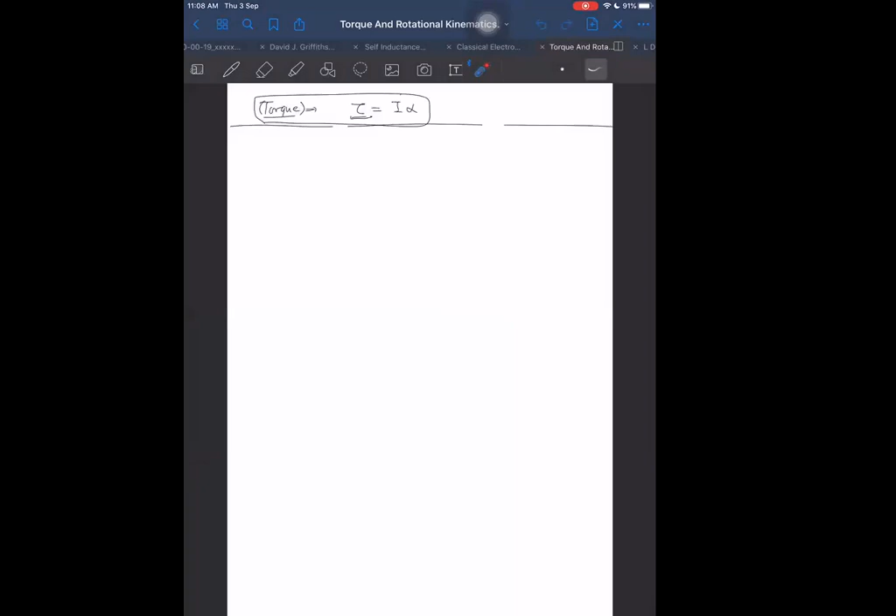So let us start. Can you see the screen? Yes sir, we can see. All right, let us continue then.

So tau equal to I alpha, I told you yesterday, right? I told you the example where the body was just rotating in one plane. The plane of rotation is fixed, so we are writing this tau is equal to I alpha.

Okay, next we have some cases. One more important thing for moment of inertia only, I have to tell you, I think that will be very much helpful for you in many places. Let us say I want to find out the moment of inertia of a triangle.

Let us say the total mass of this triangle is capital M. What I will do is take masses at the center, m by 3 each, at the center of one length, center of the other length, and center of the third length. The moment of inertia of this triangular plate about any axis will be the same as the moment of inertia of these m by 3, m by 3, m by 3 masses about any axis. You can keep on finding out now, and keep on experimenting with this.

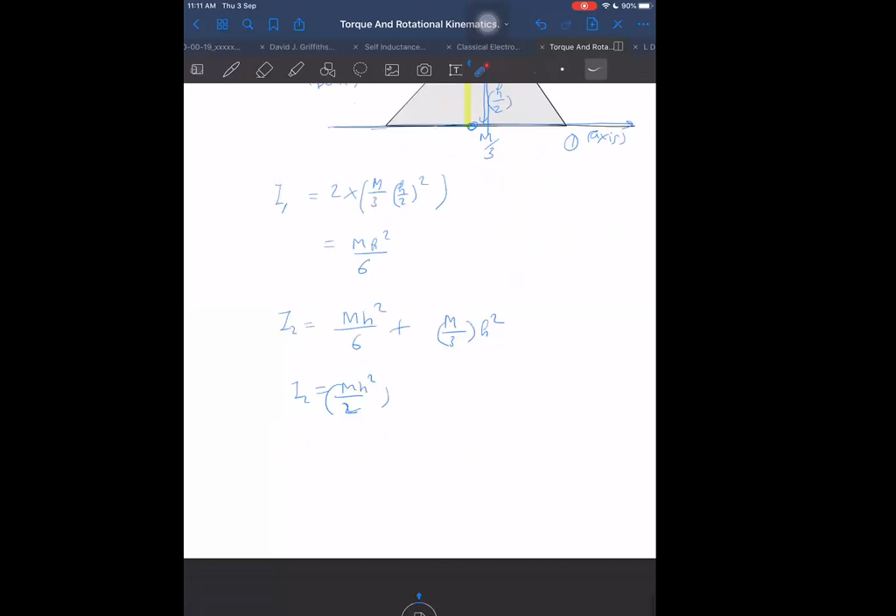We can do that, right? And it will always work about any axis. In the inverse, we can always find it out very easily. So it is very convenient, very helpful. And don't forget that formula, that also might be helpful if they are asking for oblique axis.

I told you to find out about the oblique axis, first of all we should know two symmetric axis. If I know about this axis and about this axis in the same plane, and they are asking about this axis, let us say this is the perpendicular axis, it is x-axis. They are asking about this, and it is angle alpha, and it is 90 minus alpha. Then I have told you this formula also, how to find out about this oblique axis: Ix cos square alpha plus Iy sin square alpha. So these will be helpful for you.

And okay, in fact I think once you know the triangle formula by this simple method, you can use it to derive other formulas also. For example, let's say I want to derive for the circle. For the circle also, I think I can do something, derived in the same way as for the triangle.

I will take maybe some small element here, and for this triangle, I will break it into small triangles. And for each small triangle of dm mass, I will write dm by 3 here, dm by 3 here, and dm by 3 here. So here it will be 2 dm by 3, at a distance r by 2 from here, right? R by 2 distance away, what will it be? 2 into dm by 3.

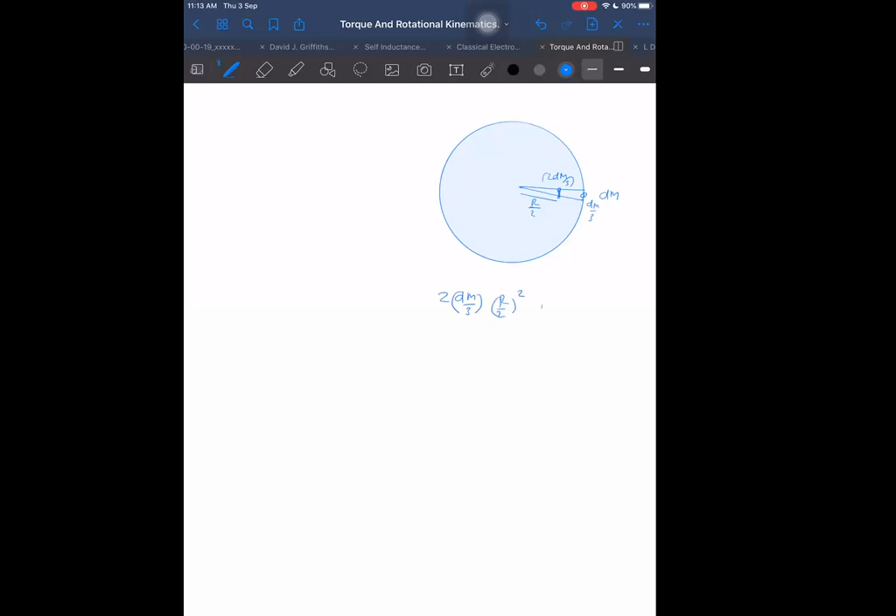Then I will find out its moment of inertia. What will be its moment of inertia? It will become 2 into dm by 3 into r by 2 square, plus dm by 3 into the total distance up to this, R square. That is r square. So what is that coming out to be? That is coming out to be dm into r square by 6 plus r square by 3, that is by 2. Now this is for dm.

Now once we know for the sector, then total will also become r square by 2 common, mr square by 2, sir. Because we are finding about this axis, about the perpendicular axis. Sir, about the perpendicular axis I am finding out. Okay.

See how easily we can get the things here. We divide into triangles and we can do this for this also.

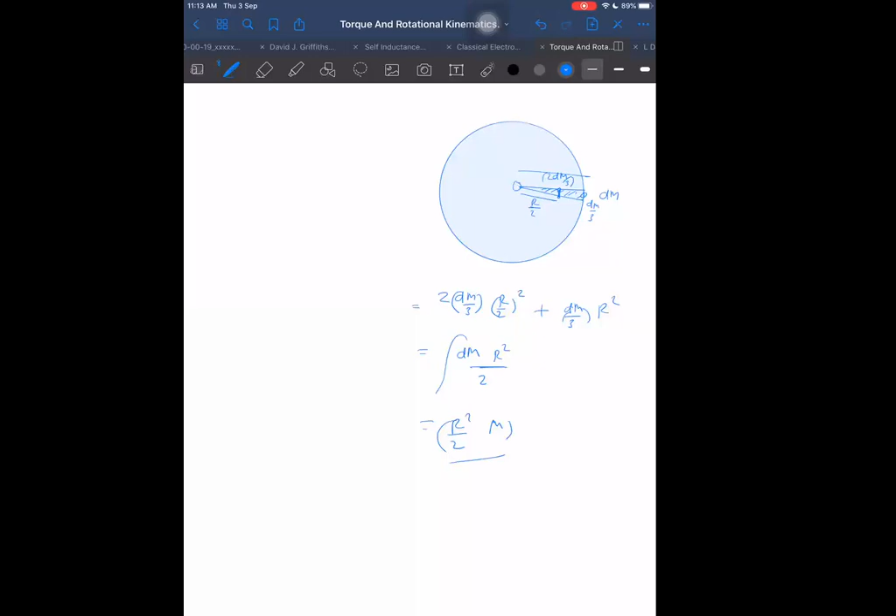This triangle trick is only applicable for triangular plates of uniform mass density. So there it will be helpful. But if they give us variable mass density, then such tricks will not work. We have to find out by normal ways only.

Anyway, let us come to application of tau equal to I alpha. Application of tau equal to I alpha.

So what application can I take for this? One, I can take a very simple pulley problem to start with, and then after that I will move on to other problems.

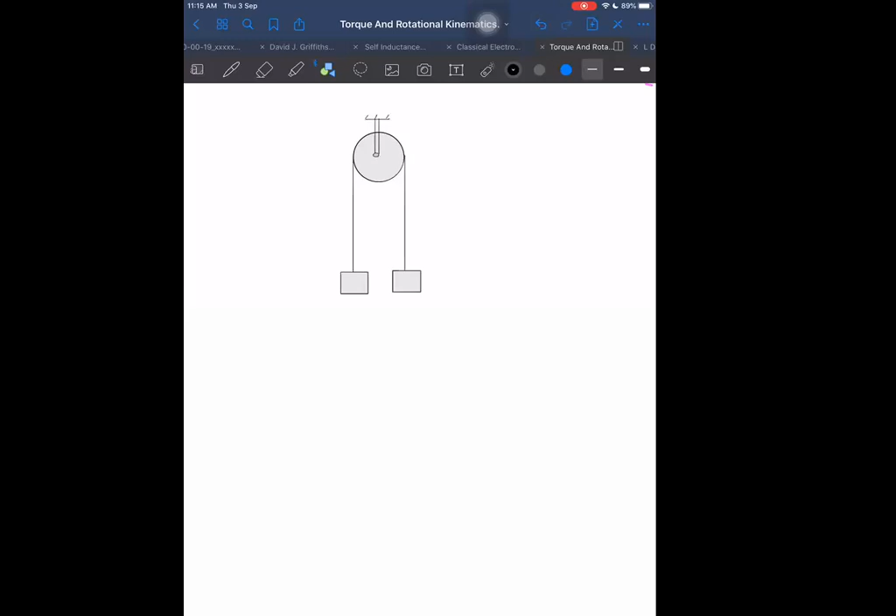Pulley has two hanging strings. One string here and another here. These two strings are attached to two masses under it, one mass here, one mass here, and this is attached to the ceiling this way. Now it is free to rotate about its axis, and sufficient friction is there.

First of all, the information given is that there is sufficient friction between the pulley surface and string.

One thing given. Second, it is free to rotate about the axis passing through it, and the pulley is free to rotate about its axis.

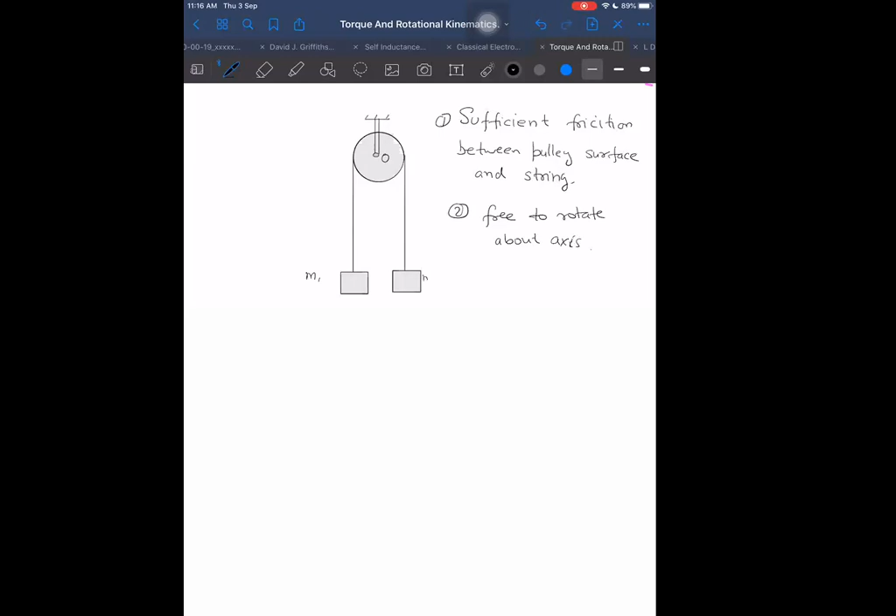Second information given: remaining mass m1, m2 given, and its moment of inertia about point O is given. So m1 is given, m2 is given, and I about O point is given. Third, what we want to find out is acceleration, and radius of the pulley is also given as r.

I told you yesterday, what I can do here is take it as r, and say it is going up with... let us say m2 is the bigger mass. If m2 is bigger, then it will have angular acceleration in which direction? Start with angular acceleration first. Always start with angular acceleration, it will be more convenient.

So it will be r into alpha upwards for this also, because this is a single string. So here acceleration and here acceleration will be the same. Here acceleration down and here acceleration down will be the same. So therefore here also it will be r alpha. Is it okay? Yes, sir.

Then now other equation we can write, for m2g downward, tensions we can write: m1g, m2g, that is it. And in between here tension T this side, tension T this side, but here tension T down and here tension T down. Tensions will be equal on it, sir? Tension will be different, no sir? Different, T1. Otherwise, obviously it won't rotate.

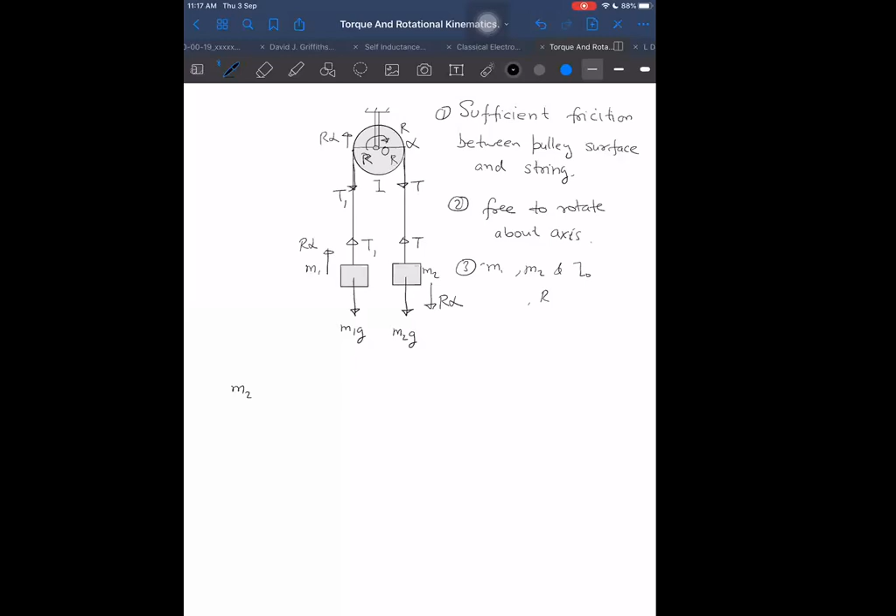Yes, that is one big thing: when this friction is present, I told you in laws of motion also, that when friction will come, then definitely we should not take the tension same. We should take different tensions, otherwise it will not rotate.

So we can write m2g minus T2, supporting force. Always go by this method: r alpha is downside, so supporting force first, then opposing force, minus opposing force is equal to mass into acceleration.

This is the equation. Next equation: T1 supporting force minus m1g is equal to m1 into r alpha, equation number 2. These are translatory motion equations, equations of sigma f equal to sigma mi ai type.

Although here there is no sigma, it is a single force and not the sum of two forces. So it is like the resultant force here, that sigma is not needed here. Just mi into ai, or m into a, is enough. This kind of equation we are writing here.

Now, one thing here: because I have to take the torque equation for the pulley, I recommend converting these equations also into that form. How to convert into that form? Multiply by r in all directions, in all places. If I multiply equation 1 by r, and multiply the right hand side also by r, then I will be getting r into this thing, and here also r into this thing — it will become r square.

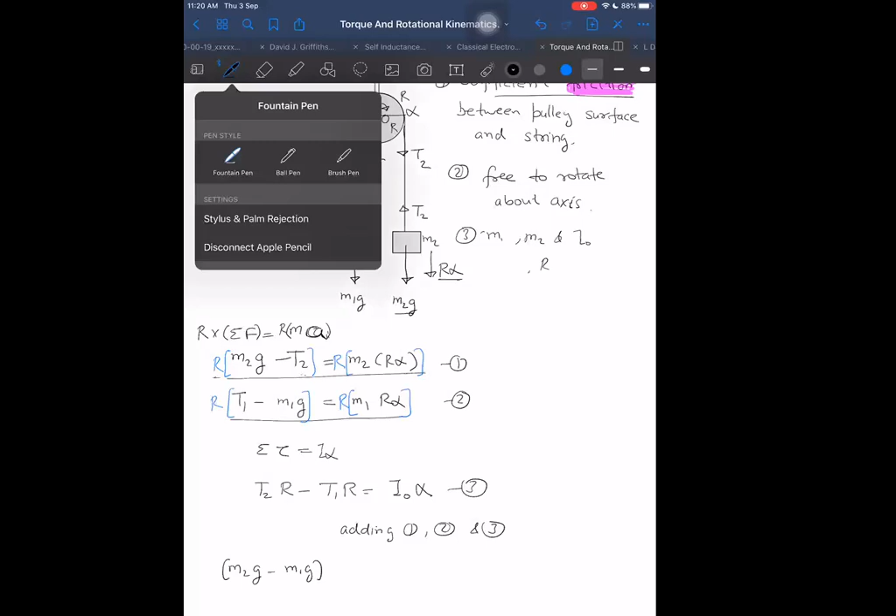Now, why I did that multiplication of R with this, now you can understand, because it will help us: minus T2 into R here plus T1 into R there. When we add 1, 2 and 3, our T2, T1 terms will cancel. Then we will be left with M2G minus M1G into R, whole multiplied by R equals to I into alpha.

This equals M1 plus M2 into R square into alpha, plus M1 into R square plus I naught also, plus I naught into alpha. So it is like that only, that net torque is equal to net moment of inertia into alpha.

Now, obviously, the moment of inertia does not make sense for which masses? For these masses, because these are not rotating about the pulley. But still, this formula works.

Why does it work? If you want to remember why it works, I have a simple way to tell you. Imagine that we know this thing will not depend on the length of the string. If it does not depend on the length of the string, I can take the length of the string so small that I can make the masses point masses, M2 and M1 like point masses. I can make this string smaller length, assume it is of this much length, then even lesser, then so much small that it is just almost touching here only.

Then it will be like M2 touching here, and M1 touching here. Then these two torques will be acting, and moment of inertia now will be like a single body which has moment of inertia not only I naught but also M2 R square and M1 R square. So that's why this is just a way to remember that we can see the net torque is coming out to be I into alpha.

We can think in that way. It means our answer will be same. If I give you this problem: pulley, and here a point mass attached and fixed to it, point mass fixed here and fixed here. These masses are given to us as M1 here and M2 here. This is I naught for the pulley, remaining pulley I naught, meaning the part other than M1 and M2, that is not included in this. M1G is separate here, M2G separate here.

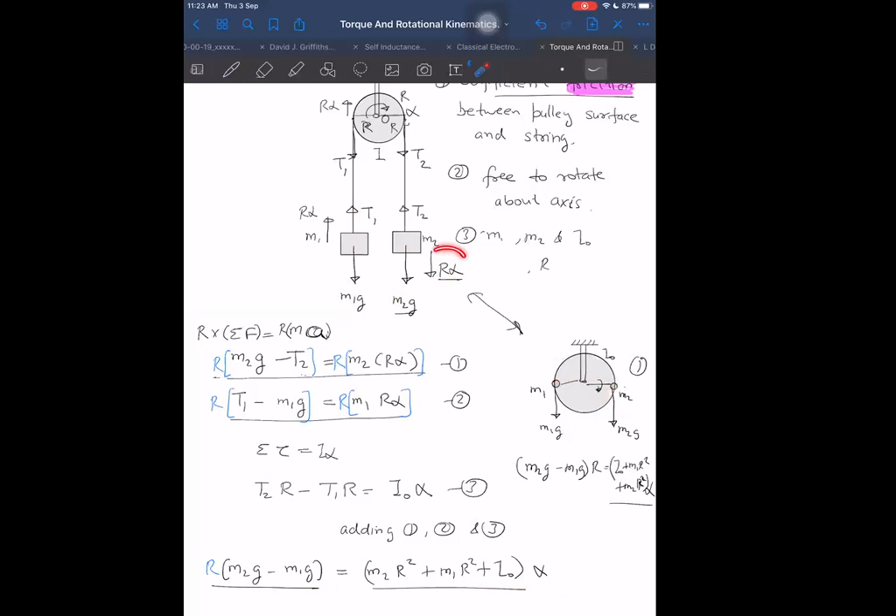But here it will change, because then M2G will come this side, M1G will come this side, torque will become different, and moment of inertia will become different. So these two are equivalent only in the initial stage.

But even if you remember that, then it will be convenient. Why is it convenient? Because in one step we are getting the answer. We don't have to write all these equations also. Just net torque is equal to moment of inertia into angular acceleration.

All right, let me give one more example with a spool. I naught, with the spool, I will give an example now. Spool means, I have given you before I think a 3D diagram of the spool. It is something like this, with one in between, some connecting cylindrical rod will be there, something like that.

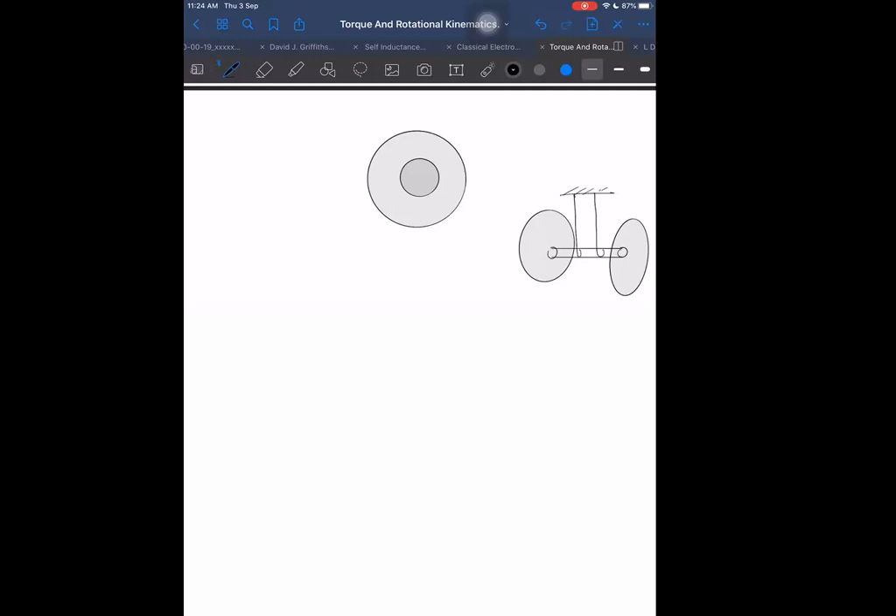Now let us say we are attaching it to the ceiling. So this complete diagram, we can simply draw as one circle here and another circle here. Inner circle of radius R1 and outer circle of radius R2. This inner circle is because of the cylinder. But we will just make its diagram simplified in this way.

This way, this is a string attached here. These are two strings there. Imagine these two strings attached to the cylinder. No, basically not like this here. Basically this is slightly different here. Okay sorry, that case was different.

Okay, first let me take this, I will draw separate again. This is not the diagram for this. This diagram is something if you want to see: imagine it is one pulley, and with that another attached pulley. The two attached pulleys are there, and along the axis somewhere we are connecting this, maybe by this way we are connecting. There are again maybe two such rods which are connected to the axis of this. Imagine like that, and this is rotating about the axis.

You can imagine this way: this is one rod, this is another rod here, some vertical suspensions, and this is connected to one rod. Around it there are two, there is one pulley only, but that one pulley has an inner cylindrical part coming out of it. Imagine like that, and that is rotating about this. Imagine this is the situation here. Can you imagine it now?

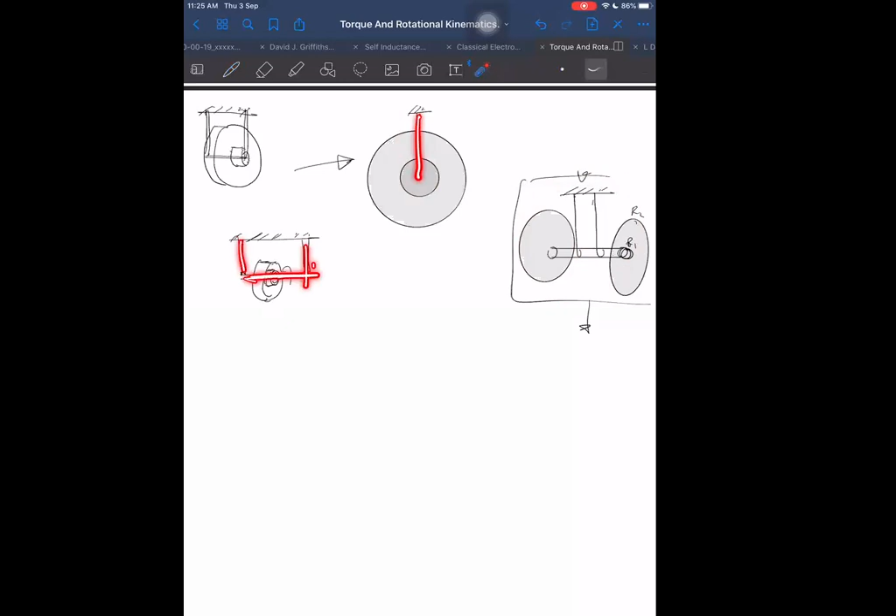Okay, this diagram will be different, I will draw. That was a different thing, but now for this, because it is wound around it, I have to draw something like this. That is a different scenario. But here it is attached to the axis, and this rod is passing through the axis, and around it we have some cylindrical pulleys. It is a single pulley only, but that single pulley has two different radii. It has one coming out, that radius is this, and the inner is also there, that is coming out of it.

Now in this we can attach masses in this way also: one mass I can attach to the inner side and the other I can attach to the outer side. That is also possible, so let us do that. And I will ask you this question, you have to answer it. One is attached here, wait a second.

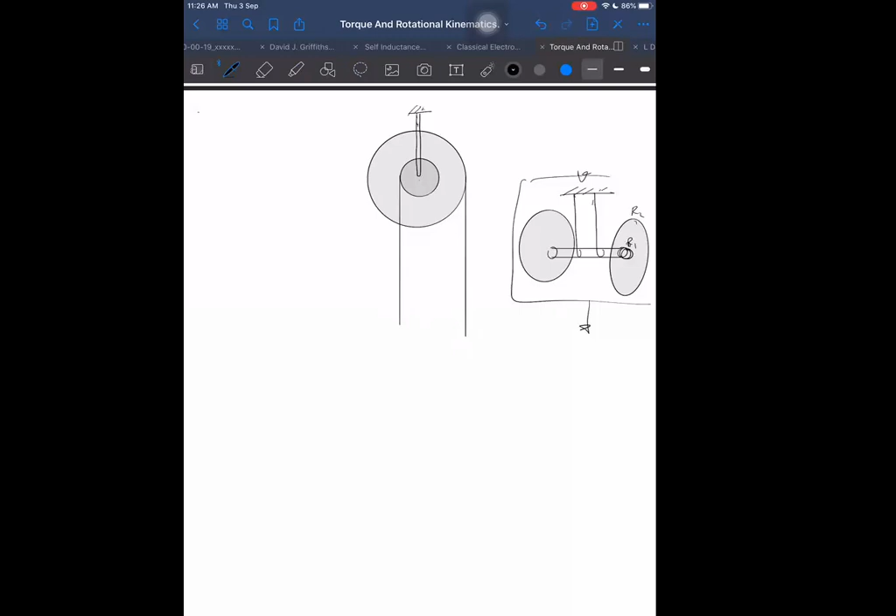This is one, and the other one is outside. This is the other one. Left hand side mass is M1 and right hand side mass is M2. Start solving it. The moment of inertia of this complete spool or pulley is given as I0, about point O. Again, same conditions, frictionless inside, axis completely frictionless, but surface has some friction. Radius is also given: inner radius you take as R1, and outer you take as R2. This mass you take as M1 and M2.

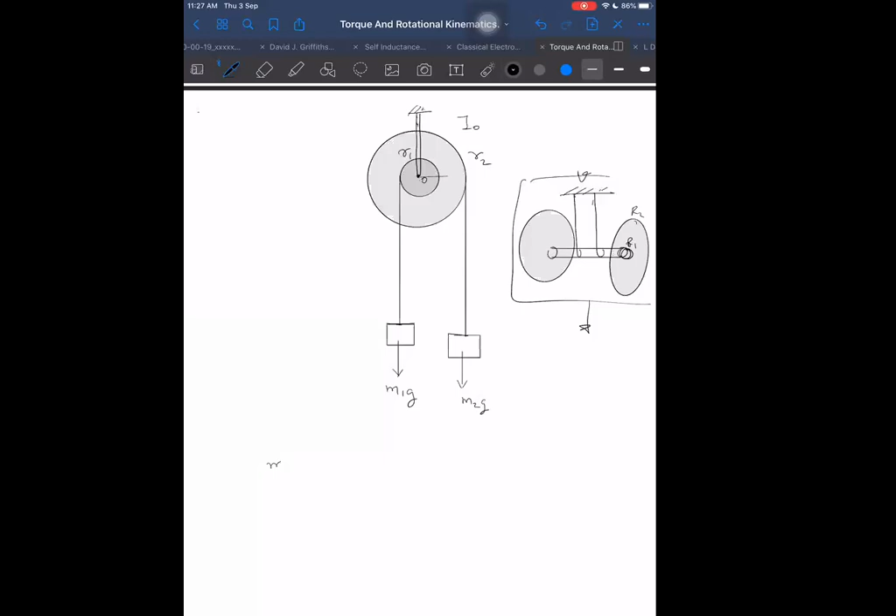How do we do this? Same way, net torque. What is the torque now? Which side has more torque? Assuming M2 side is more, and it is accelerating this side, then M2G into R2 minus M1G into R1 is equal to moment of inertia about the center of the pulley, plus for M2, using the trick that M2 is attached here, we get M2G R2 square plus M1G R1 square, not G, M2 into R2 square, plus M1 into R1 square.

What do you want me to find out? Alpha only. So we are getting alpha equal to M2G into R2 minus M1G into R1, upon I0 plus M2 into R2 square plus M1 into R1 square. This way we can quickly get the answer in one step only. This is our answer, this is angular acceleration alpha.

Now if somebody asks, I don't want alpha, I want accelerations, I recommend you do it this way only. After finding alpha, write R1 alpha as the acceleration, and R2 alpha as the downward acceleration at this point, since it is rotating about it with angular acceleration alpha, like circular motion. For circular motion, tangential acceleration will be R2 alpha here, and R1 alpha there. So it's simple. From R1 and R2, we can find tensions easily. Is it right? Yes, we can do it.

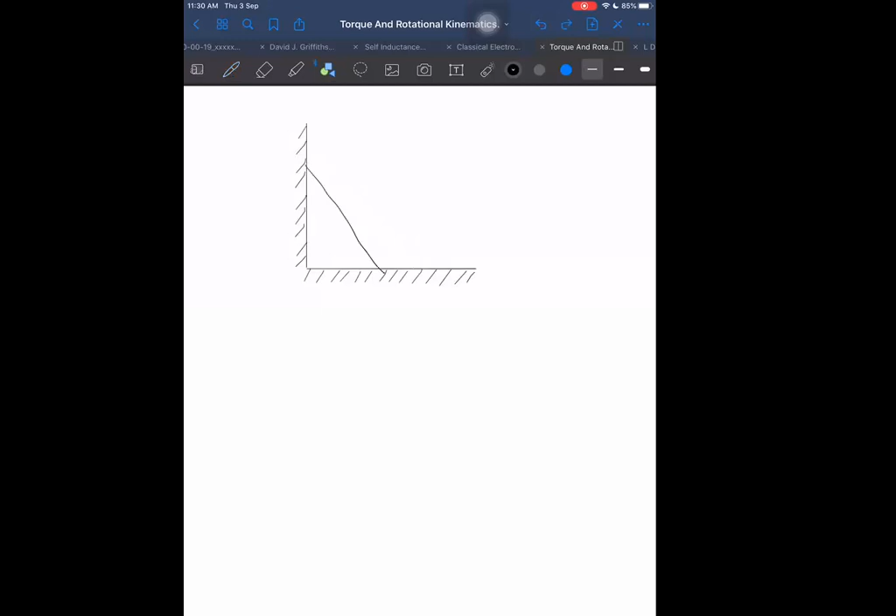These are two walls, and these are the diagrams. Now this is mass m, and as you can see from the diagram, let us say the surfaces are frictionless, mu is zero everywhere. Another question I will take after this, in fact from Pathfinder as well once this is finished—there are so many nice questions there.

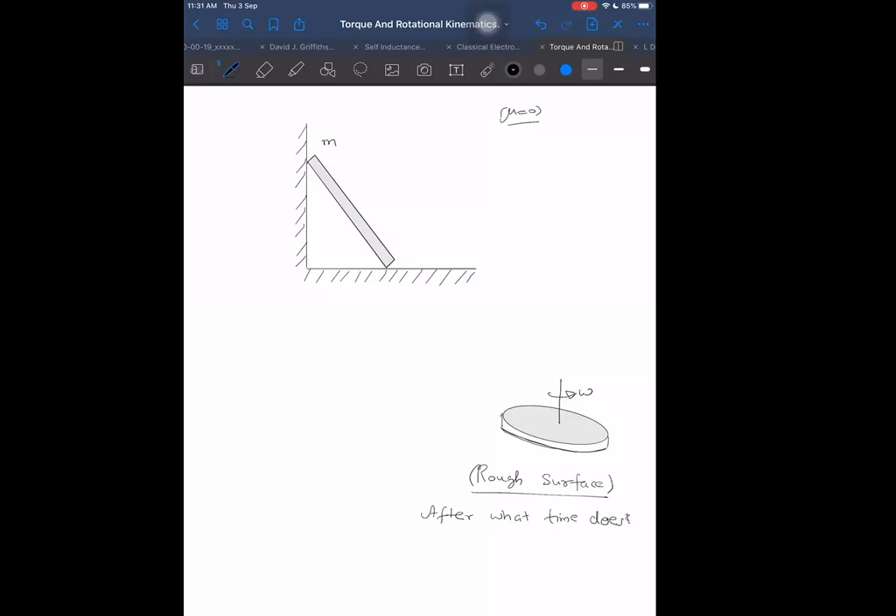This one is a disk, and it is rotating with angular speed omega, and then it is just placed gently on a rough surface. It was rotating with angular velocity omega, placed gently on the rough surface, and we have to find out after what time does it stop.

So we'll do this question first. For the upper one, we have to find out what—angular acceleration maybe. Can you find out the angular acceleration for the upper one? And another question I can ask, a very simple one—although it may not appear that simple in the beginning, but it is easy.

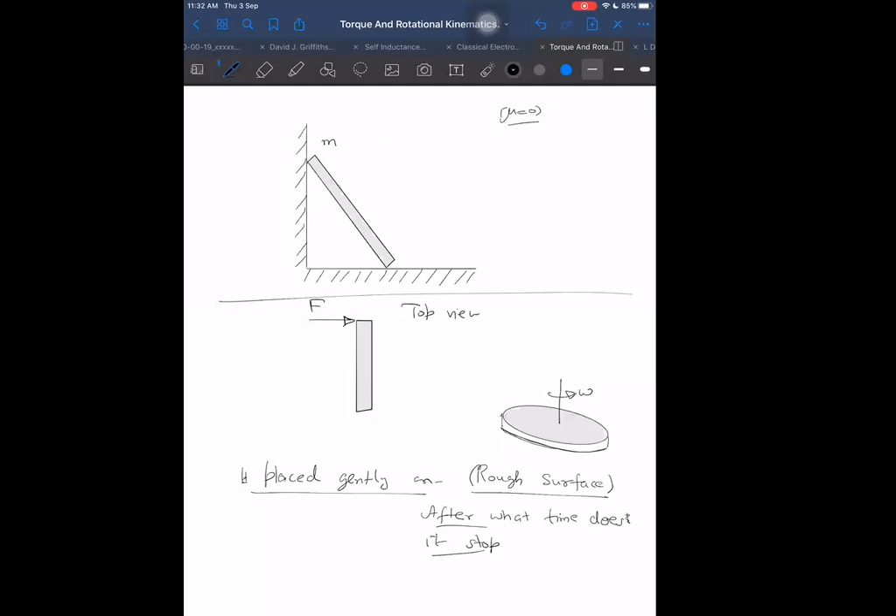This is the force applied on it, shown in top view, and this system is kept on a frictionless horizontal surface. Mass is m, length is l. We have to find out the angular acceleration again.

Energy also I have to take, just keep that in mind—after moment of inertia is finished, I will start taking questions on energy. But first let's do some more questions on this. This is mg at the center, it is a uniform rod of length l, and if you want angle theta, that is given to you. Find out the angular acceleration here—what is it for the first case, the second case, and in the third case I'm asking for time.

Second case, F into L will be torque, but one thing here—about which point are you taking the torque, and why have you chosen that point? The end point. Why are you taking torque about this point? What is the reason for that?

It will topple—wait, first of all, what toppling? It is kept on a frictionless surface, lying on a frictionless horizontal surface. It's a top view, just lying on the horizontal surface. How will it topple? You're not understanding—a stick already lying on the ground, how will it topple? If a stick is standing on the ground, then it will topple, but this is already lying on the ground.

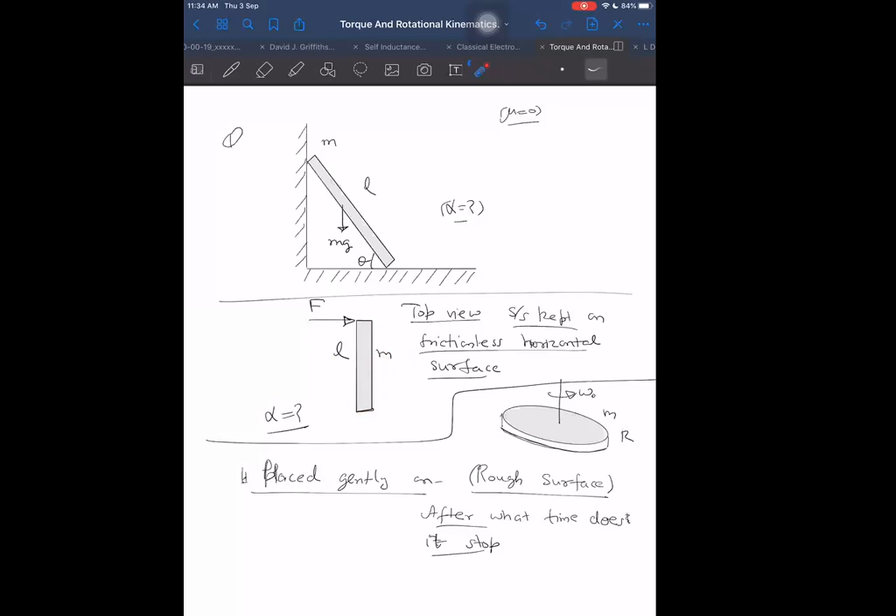Therefore, in such cases, it is recommended to take the axis about center mass. But whenever there is a fixed axis of rotation, then no need to find center mass - I don't even know where it is, but I'm just finding the torque about that point, whether it is center mass or not, I don't care. So when we have a fixed axis already, we take torque about that - it will be convenient. But when we don't have a fixed axis, the convenient point will be the center of mass.

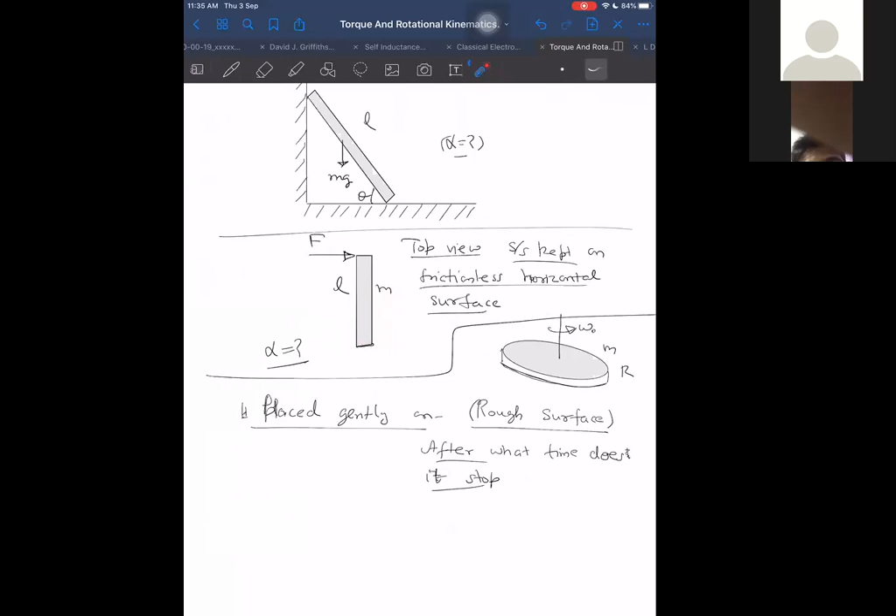Can I find it about some other point? Yes, but I have to additionally take the torque due to pseudo force also, so I want to avoid that as far as possible. But in some cases, when it is not avoidable, no problem - I'm not saying we cannot take it about that point. We are just trying to find out which is the easier thing to do. The easier approach here will be taking torque about center mass and solving it.

What about this one? Let us think in different ways. It is N1, it is N2, and I want to find alpha. We can take it about center of mass. If I take it about center of mass, I will get a relation between N1 and N2 in one equation. But I still need one more equation, otherwise I will not get the answer because there are two unknowns - no, three unknowns, including alpha.

N1 equals N2 equals mg, we can take? Force balance - N2 is not mg. How can this boy say N2 is mg? Really, is it at rest? Is this body at rest so that you are saying N2 equals mg? No, sir, it will be accelerating, and you are saying it is mg.

How will it be accelerating? How will the center of mass be moving? I have discussed this before during circular motion - it will move in a certain way, and I gave you the reason why. Most students think it will move one way, but it will not move that way. Center of mass will move in this way, along this path. Why will it move in this path?

The reason is, if I take a rectangle here, this is the diagonal of the rectangle - one diagonal. This diagonal will always be at the same distance from the origin. Why? Because we know these two diagonals are equal. One diagonal length is L, the other diagonal length will also be L, and it is the midpoint of the diagonal, so it will be L by 2 length. So the center of mass will always remain at a fixed distance from here - always L by 2 distance.

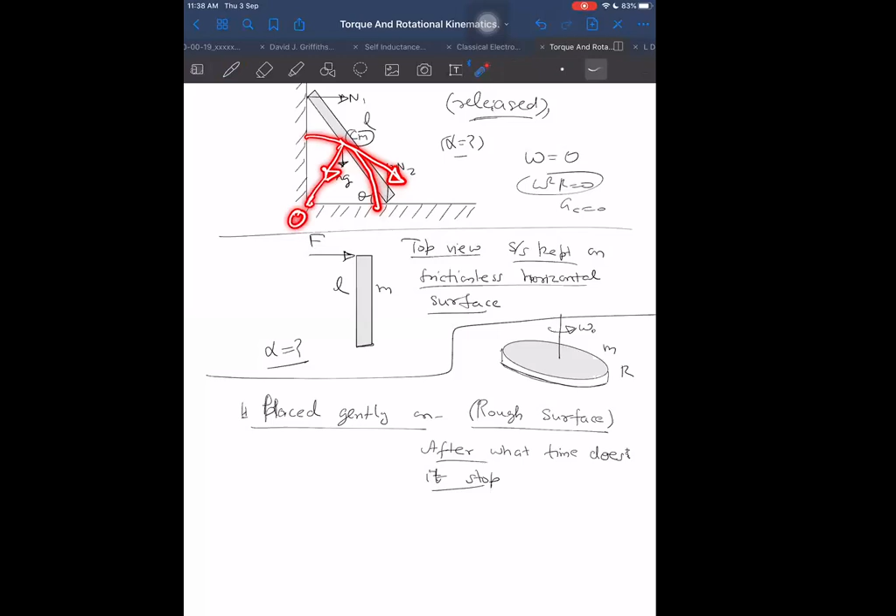Only tangential acceleration. If it has only tangential acceleration, and I know the direction of that acceleration, then by knowing the tangential acceleration and the distance from the instantaneous center of rotation, which is this, that way also we can find it. This is the center of the path about which this body is rotating, but this is the instantaneous center of rotation here. So about this point, I can find out the angular acceleration in this direction. It is not a tough task to do.

But how do we find out the tangential acceleration? Can you find it out by writing the force equations along x and along y? No, that will also not be possible. There are how many unknowns? N1 unknown, N2 unknown, and alpha - 3 unknowns. So I need a third equation definitely. I need that third equation also.

Or can I get it? I think I can get maybe. This is tangential acceleration, then vertical. No, I need that third equation definitely. So I can do this way also. This is the point here about which this body is rotating.

So I can find out that tangential acceleration is just L by 2 into alpha about this point. Once I know this tangential acceleration is L by 2 into alpha, and torque about this point is due to N1 zero, due to N2 zero, because these two are passing through this point. Then due to which force is there a torque? Due to mg there is a torque. What is the torque due to mg? Due to mg, torque is mg into L by 2 cos theta about this point.

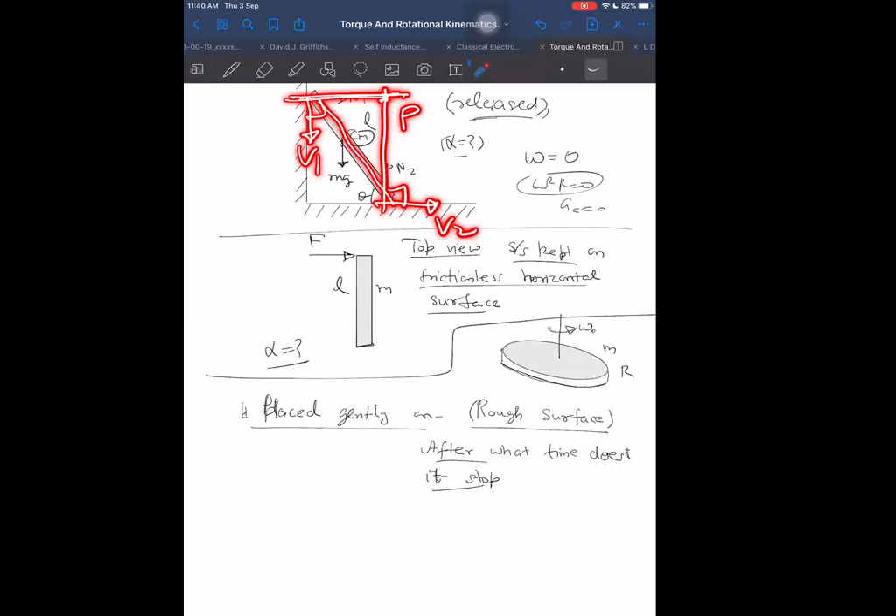Yes, this is the instantaneous center of rotation of this rod. I'm not saying that it is rotating about this exact point - it's the point about which the center of mass is rotating. That is the origin about which the center of mass is rotating. It is the instantaneous center of rotation of the whole rigid body, meaning at this instant of time, this whole rigid body appears to be rotating about point P, including the center of mass. So at this instant, it is rotating about this point.

What do we get now? Well, then the torque equation about this point: due to N1 zero, due to N2 zero. What is the torque due to mg? Due to mg, it is coming out to be mg L by 2 cos theta, because the perpendicular distance from here to here is L by 2 cos theta.

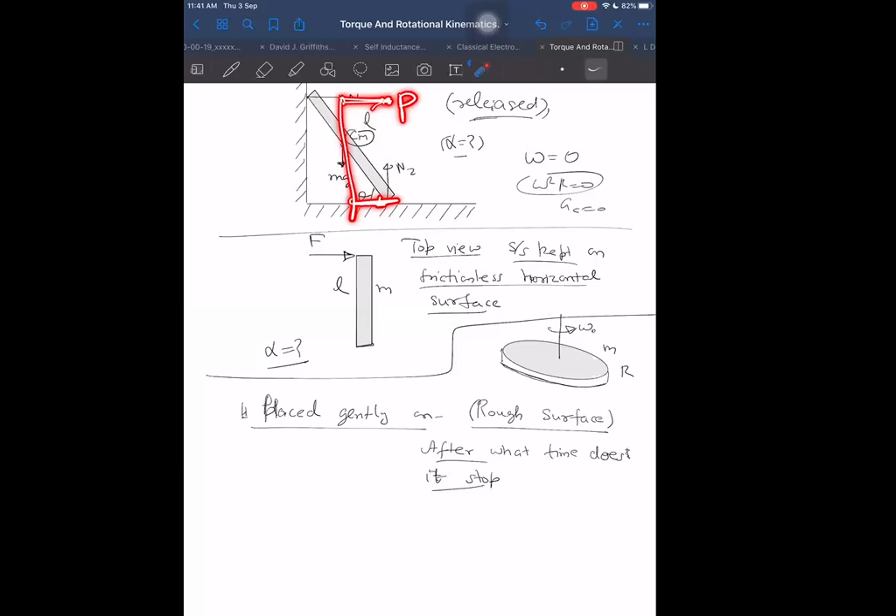Once I know that torque, then torque is equal to moment of inertia about point P into alpha, and moment of inertia about point P is very easy to determine. Why is it very easy to determine? Because using the parallel axis theorem, we can get ml square by 12 plus... We can, so just do it once. Determine it once. Do one and do two. I'm giving you some time to do both of these, and then after that I will take the third one myself.

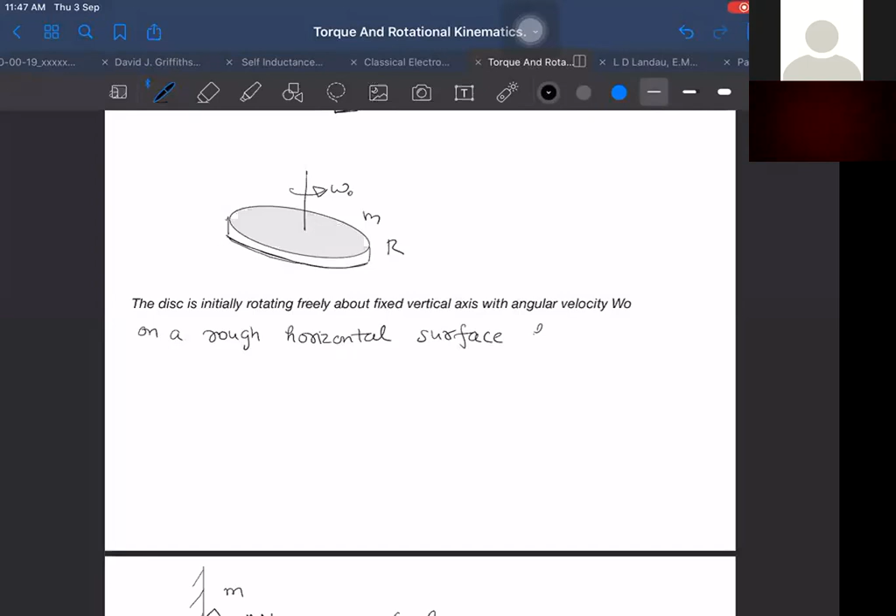Sir, I have a doubt. Before you said one problem - force is applied on the rod, and we need to take it as rotating about the center of mass. Sir, if you take about the endpoint, another endpoint, there also pseudo force acts, sir.

Yes, and if you take that point as the axis of rotation, then torque due to that force will also be acting. So will the torque due to pseudo force also be zero about that point?

Pseudo force always passes through the center of mass. If you are applying pseudo force at the center of mass, then obviously torque due to pseudo force will be zero only about the center of mass, only about center of mass, because pseudo force passes through center of mass.

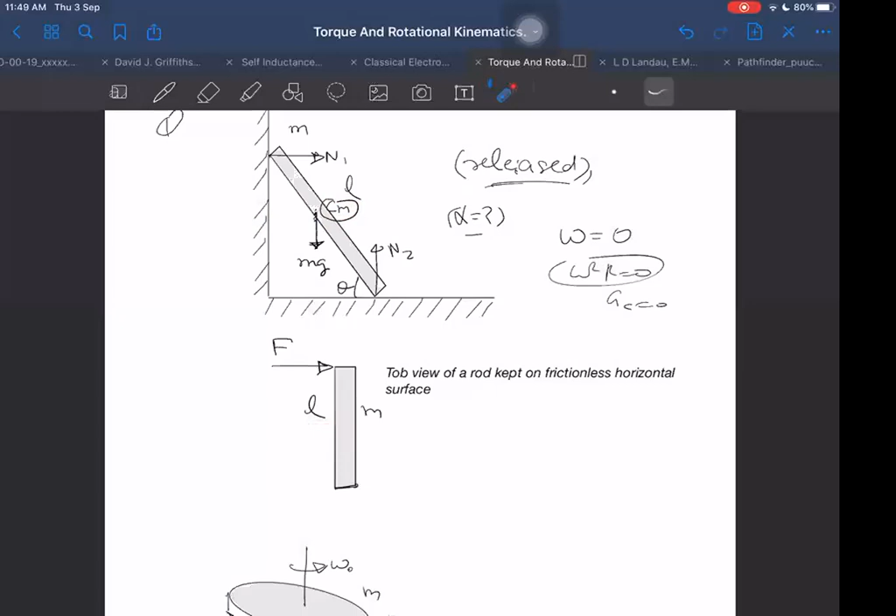Okay, sir. Got answers for both of the above questions? Yes, sir. Okay, let us see the first one then.

In the first one, this is our instantaneous center of rotation. One option is I can also take about the center of mass, but it is convenient if I take about the center of rotation. Whenever we can find it easily, we should take about that. The torque about point P is equal to I about P into alpha.

That is finally mg into L by 2 cos theta. The reason is the perpendicular distance of the line of mg up to point P is L by 2 cos theta. Why is it L by 2 cos theta? Because this distance happens to be equal to this distance, and it is easy to tell here that it is L by 2, so it is L by 2 cos theta.

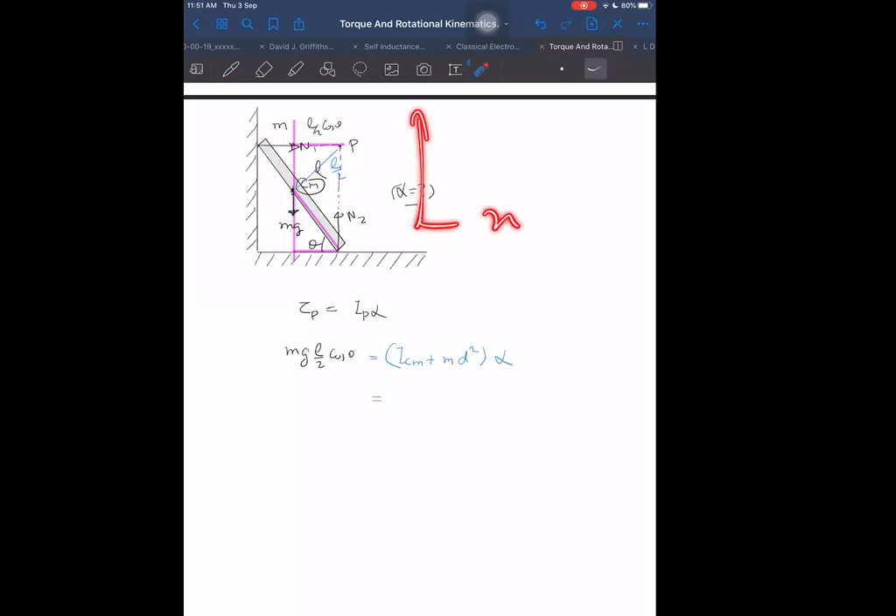And ICM, we know ICM is equal to - about which axis should I take here? Perpendicular axis or the axis in the same plane? I have to take the perpendicular axis. Why so? Because it is rotating about this axis, rotating in this plane. If the plane of rotation and axis are perpendicular to each other - here the XY plane is the plane of rotation, so the Z axis will be the axis of rotation. So I have to take the perpendicular axis passing through the center of mass here.

If it is passing through the center of mass in this way, that will be equal to ml square by 12 plus ml square by 4, into alpha, is equal to mg into L by 2 cos theta. So alpha is equal to 3g by 2l into cos theta.

No sir, in the denominator cos theta? No, sir, this is correct - correct only. Yes sir, so this is what we are getting. Next, sir, one minute.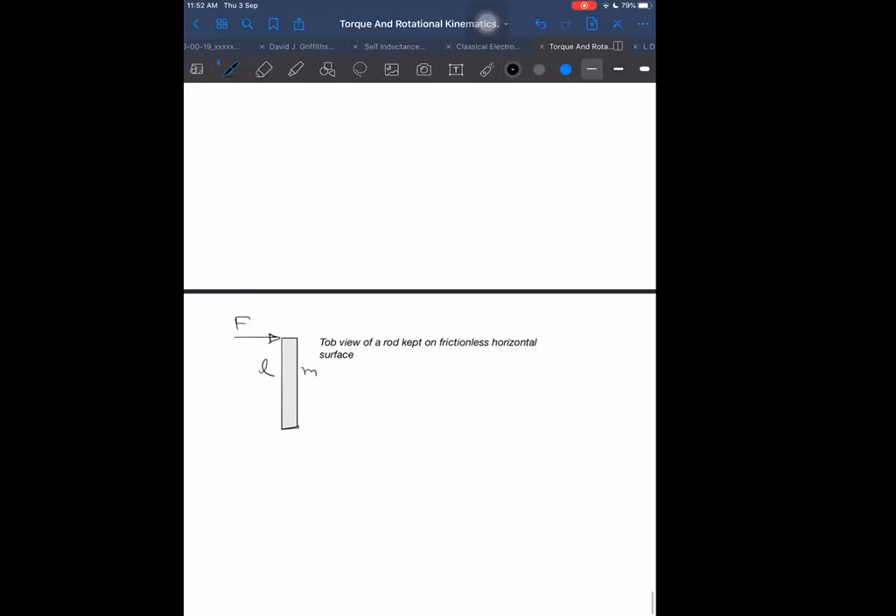Okay, by symmetry, yes. This is a basic property of rectangles you should know. I explained this before, not just telling it directly. For any rectangle, this length and this length will be the same and equal, it will be bisected. All are equal.

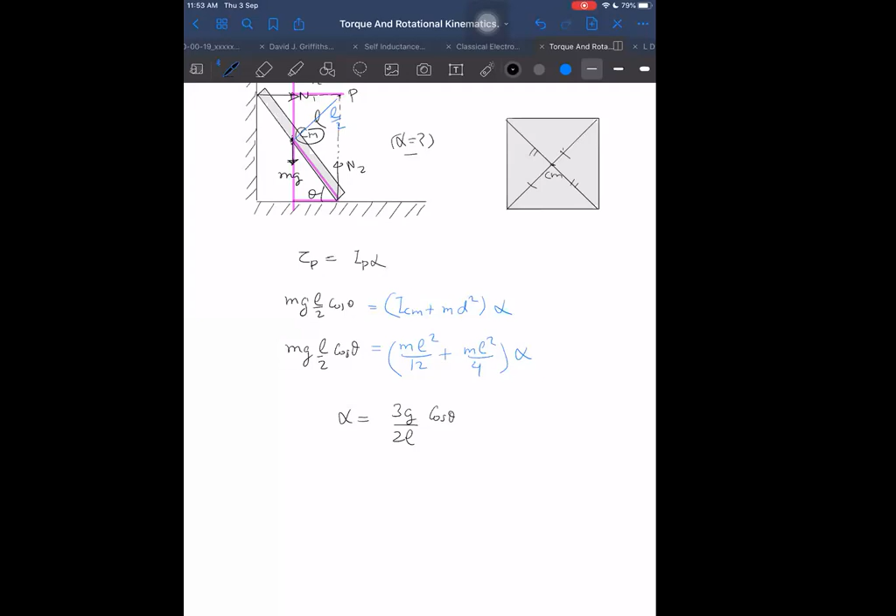Sir, L by 2 cos theta, how did it come? This is L by 2 cos theta - the perpendicular distance. Is this equal to that or not? Yes sir, these are equal, so it is also L by 2 cos theta. Why are you asking this? Don't you know this is a triangle, and with angle theta here it's a right angle triangle, so it will be L by 2 cos theta only? How many times have we done such things before?

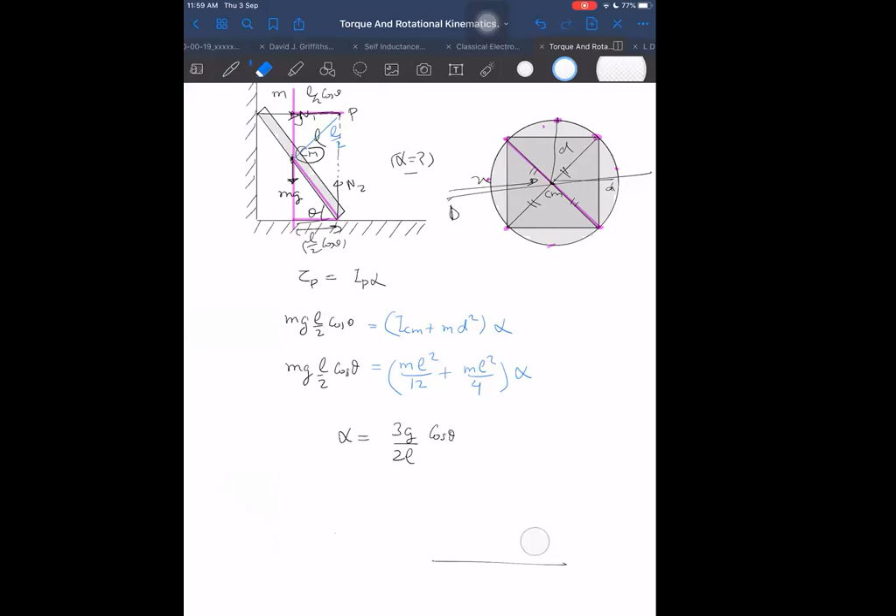Say next one, continue sir. This one you do know. About the center of mass, you have to find here. About center of mass, why? Because here we don't know what is the location of instantaneous center of rotation. When we don't know the location of instantaneous center of rotation, then I will find about the center of mass.

In fact, okay, let us do one more thing here. Okay, no, that is enough. First of all, F into R is what? F into R is equal to, not R, F into L by 2. Into L by 2 equals to F into L by 2 is equal to M into L square by 12 into alpha.

I can write this equation about instantaneous axis of rotation also, and I don't know where that is. Let us say instantaneous axis of rotation is at a point P, and that equals ml square by 12. ml square by 12, yes sir.

Let P be the instantaneous center of rotation, point P, and we have to locate P also. Let us say this question is asked. Let's find out the value of P, find out the location of the instantaneous center of rotation.

Then we know that this equation can be applied about P point also. Why am I choosing P point here? Why not here, why not here? I know one thing, that when force is applied this side, then with respect to center of mass, it will start gaining angular acceleration in this direction.

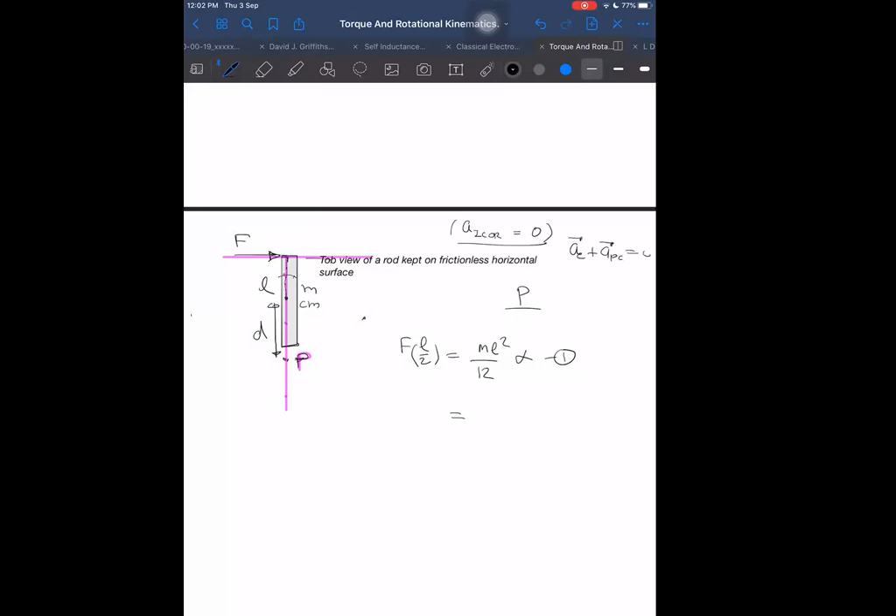Let P be the instantaneous center of rotation. Then AC should be equal to minus of APC. But acceleration of any point with respect to center of mass will be equal to R alpha, because there is no omega square R component, and we know it is moving in a circular path, every particle is moving in a circular path, and there is no centripetal component here. So only tangential component is there, so it will be R alpha.

So I can say that magnitude wise, AC will be equal to R alpha, but direction wise, these will be opposite, so that the net comes out to be 0. So in which direction will the center gain acceleration? That is very easy to tell, and we can find out acceleration quickly also.

Force upon mass will be the acceleration of center of mass. What is the acceleration of P point? I don't know, but I know that if it is d distance from the center of mass, then d alpha acceleration backwards. And we know that we have to add AP, this is APC, acceleration of P with respect to C, plus AC, this total should be 0, or AC magnitude wise should be equal to d alpha. Here I have taken it as d, so I will take it as d alpha.

So I know that P point must lie somewhere along this line only. Along which line? Along the line which is perpendicular to the line of force and passing through center of mass, which is perpendicular to the line of action of force and passing through center of mass. How to find the line of action of force?

Do you remember this thing I discussed before, I think last week, that when there are multiple forces acting, F1 acting, F2 acting, F3 acting, how to find out the line of action of force? I told you this way we will find out. We will use two equations: net force should be equal to sigma Fi, one equation, and net torque about center of mass due to the single force F should be same as due to all these individual forces.

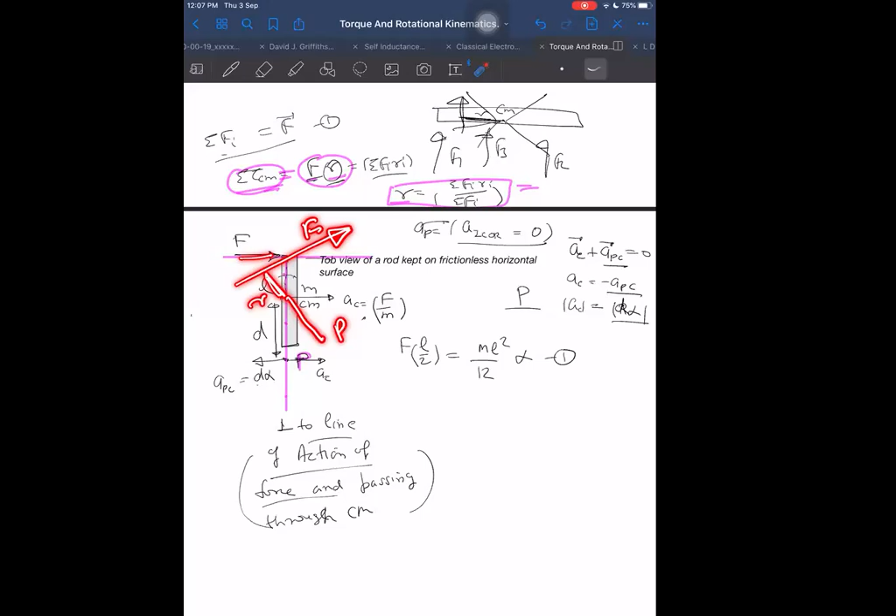If this force would be this side, let's say this force is in this direction. By chance, I have not given it on this side, I have given it on this side. Then this is the perpendicular distance r here. And from here I will go in the other direction somewhere, where I will choose some point P at a distance d away, where that will be acting as the instantaneous center of rotation.

This method of finding the instantaneous center of rotation I will use only when there is no way to find it using velocities. Here there was no way to find it using velocities, because it was initially at rest. So whenever it is initially at rest, I will use this method to find the ICR. Is it okay?

Is it okay? How to find out ICR? Don't worry, just keep on learning the concepts. Don't worry about this problem, I will take this problem myself, so don't worry about it. But I'm telling you that we can find out ICR.

Now you may be thinking, why this much big story about ICR? What is the advantage of that? The advantage is that I can apply the torque equation either about the center of mass, or I can apply it about ICR.

Wait a second, I want to do this in general, not just for this case. I don't want to take it as L by 2 also, I want to take it as something else. Why don't we do it completely in general, so that it is applicable always, and it will be so much helpful. After that, you will use it in many places. Otherwise, you will use it only in this one place.

Let us take R1, R2. R1 is the distance of the line of action of force, and R2 is the distance of the point P at which is the ICR. So what is R1 here? Let me define these terms first of all - what is R1, what is R2, etc. Then after that, I will tell you how to do it.

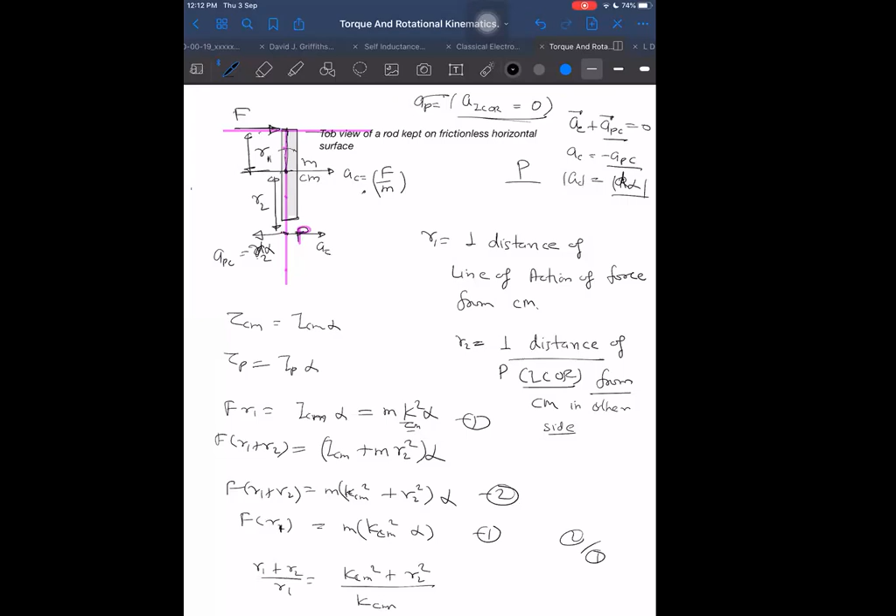If I divide these - F into R1, and there it is M into K CM square into alpha - what do I get if I divide equation 2 by equation 1? F cancels out. I will be getting R1 plus R2 by R1 is equal to K CM square plus R2 square upon K CM square. And what do I get from here? I will be getting something very, very interesting, important, and useful. 1 plus R2 by R1 equals 1 plus R2 square by KCM square. Then the 1 cancels, R2 by R1 is equal to R2 square by KCM square, R2 also cancels.

R2 also cancelled, right? Then we'll get R1 R2 equals Kcm square equals R1 R2. R2 equals Kcm square. What a wonderful formula. Kcm is the geometric mean of R1 and R2.

Is it not wonderful? Yes sir. No, not just because of that. I'm not interested in just writing geometric means. Don't think I wanted to write it this way just because of my interest in geometric mean. It is such a convenient formula, and it is not found in any of the books.

So that's why it is unique. You will not find it anywhere else, and it is such a convenient formula. Even if you find this formula elsewhere, you will not know its applications the way I will be applying it. I will apply it in several places, not just one. Let us start applying it now for this particular above question.

So this work was done, and it was lengthy work, but now it is done once and it is applicable always. I don't have to do it every time now. Whenever I want to find the instantaneous center of rotation, I will just write R1 into R2 equals K square, and K is already known to everybody.

For this particular case, what is K square? Kcm square. For this particular case, Kcm square is nothing but L square by 12. So let us do that here.

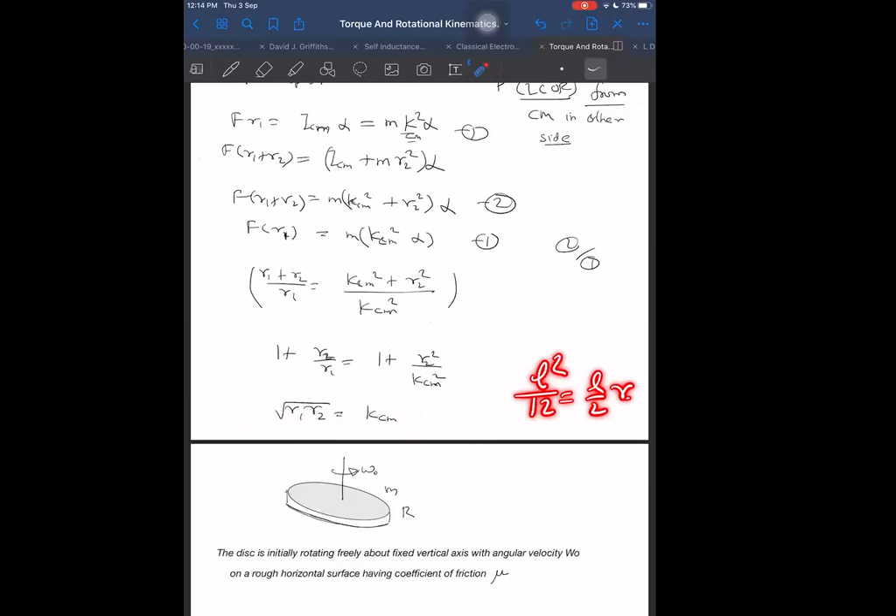It is L square by 12, and on this side it is L by 2 into R2. Let us take it as square only. So L square by 12 equals L by 2 into R2. Then R2 is equal to L by 6. Yes sir, R2 is equal to L by 6.

So from here, at a distance L by 6 on this side, there will be one point about which this body will appear to be rotating. If it is appearing to rotate about that point, then what equations do I have now? Let us write that equation. It is such a simple equation now.

Wait a second, I will make a space here and get the answer here only. I just want to show you how easy it is to get the answer this way. I will make some space here and in this little place I will get the answer. See how. I will write: F into L by 2 is equal to ML square by 12 into alpha. That's one equation. Second equation about...

Equals alpha, into alpha. Next, second equation. Second equation is for what I wanted to find out now. Main aim was to find alpha, it seems, right? And we need two equations of f and alpha in order to get alpha.

So another equation - although I have other equations also here, for example I have one equation f. Right now, sir, 6f by m equals to alpha. Yes sir. Alpha equal to 6f by ml. Right, we can write it that way.

And then one other equation I want to write, that is about the instantaneous center of rotation, which is becoming f into L by 2 plus L by 6. That is equal to 2L by 3, I think. Is equal to 12 by 3... ml square by... no, why?

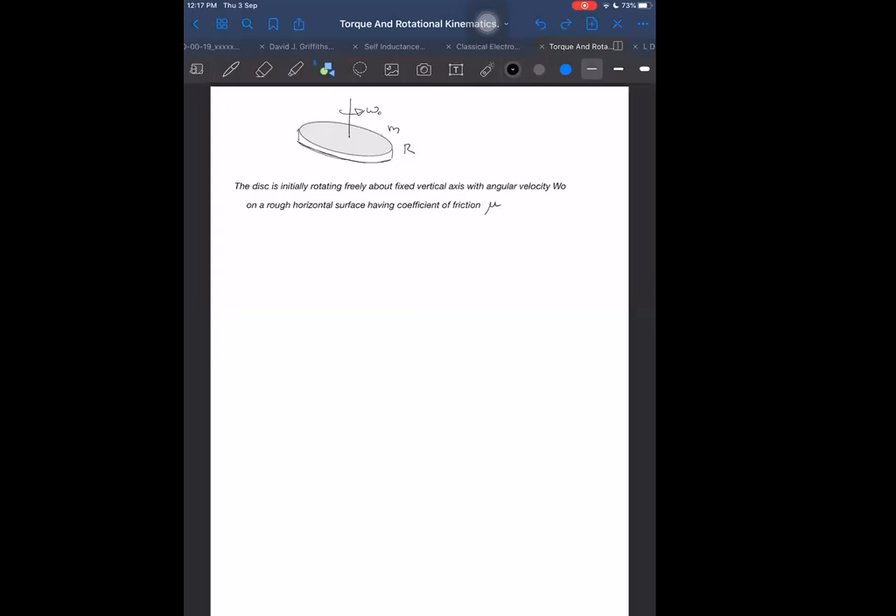How to do this? Remember, I took this example before while dealing with equilibrium cases. I took this example that I can take some element here, an element, and for that I will find what is happening here really. For that element I will find the torque, then I can find out the net torque, and net torque upon moment of inertia about center of mass.

Net torque about center of mass upon moment of inertia about center of mass will be equal to I alpha. Alpha will be equal to, torque about center of mass will be equal to, how to apply the torque equation? Now torque equation is mu into dm mass, let us say dm mass, it is at a distance small r, divided by m r square by 2.

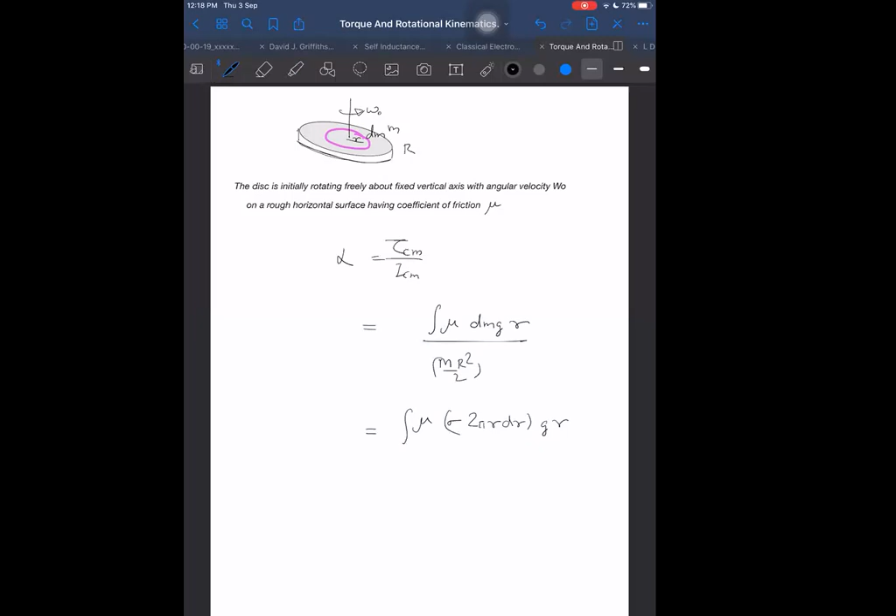What is the numerator here? Numerator is mu into dm, can be written as sigma into 2 pi r into dr into g into r, limits 0 to capital R, divided by m r square by 2. Can you get alpha from here? I'm not saying you keep carrying this numerator and denominator unnecessarily. Find torque separately, and then at last we add it. Find torque separately here, torque about center of mass.

Mu into 2 pi into g into r cube by 3. R cube by 3, what is that at last? That is equal to mu into 2 pi g into sigma, which was left out. Sigma is mass per unit area, m upon pi r square.

You know sigma is mass density, I have used it several times. Then it becomes, at last, pi cancelled already, no need to write pi. 2 comes, 3 is also there, m is also there, g is also there, and R is also there. Then alpha will be equal to this upon M into R square by 2, which is 4 by 3 into g by R.

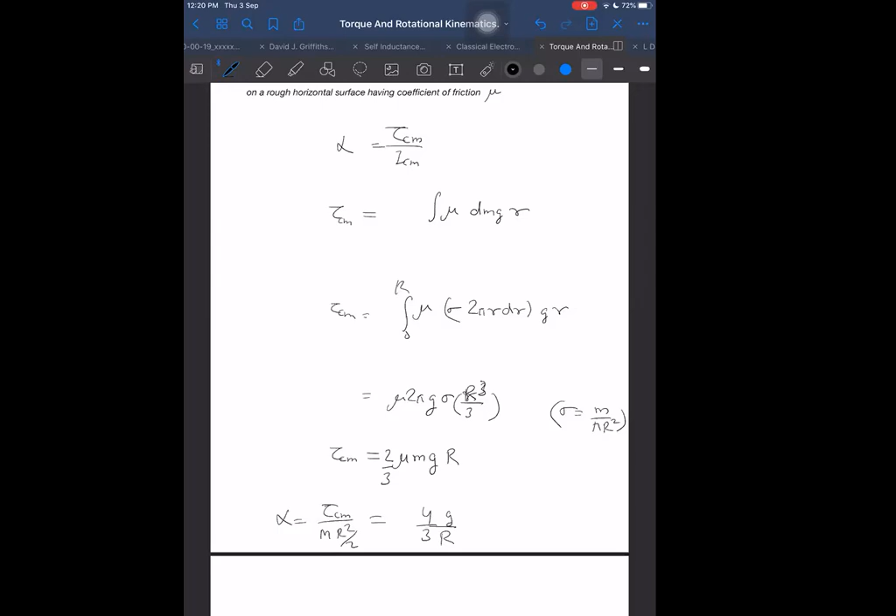That is alpha. After knowing alpha, what next? Alpha obtained. Then angular velocity was given, omega naught, and we need time taken. It is simple now, uniformly angular acceleration, final omega is equal to 0, initial omega is omega naught, so we can write omega naught divided by alpha is equal to time. Getting the answer, this is the time at which it will stop. Another example we can take now

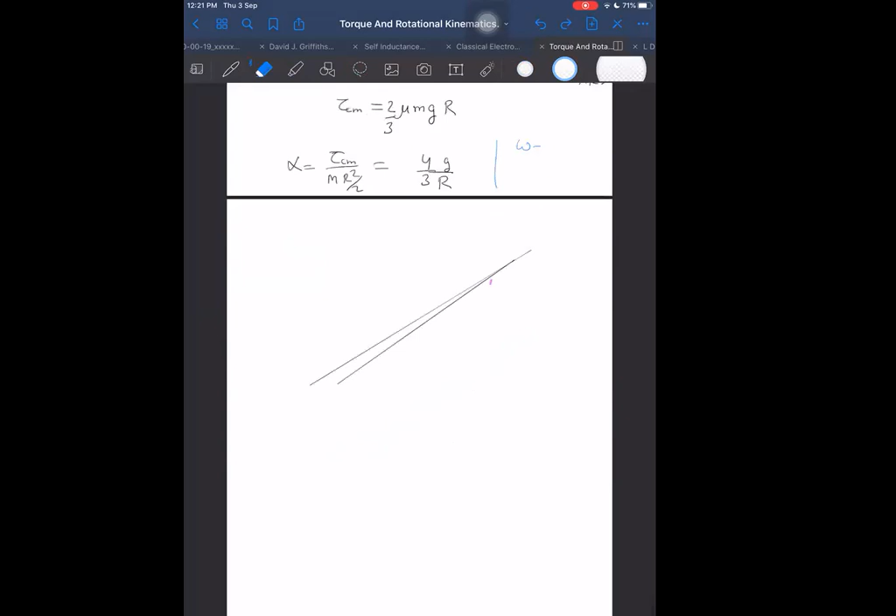This is the inclined plane here. What is happening really? Moment of inertia about the center of the spool is IO, radius of inner one is A, outer one is B, and frictionless surface is given, and mass of this is given as M. Find tension, and that's it, I think, tension.

If you are able to find tension, then before that you have to find out all those things starting from alpha. Whether they ask tension, or in torque in the rotational mechanics chapter, I'm giving you a very simple trick, it will always help you. Whatever they ask, forces or anything, start with the torque. Go to alpha, then go to acceleration, and then go to forces. Always use this method.

If they are asking angular velocity, etc., then use, if possible, conservation of mechanical energy wherever applicable. If mechanical energy is conserved, we don't follow torque equal to alpha, we directly use mechanical energy conservation. But where mechanical energy is not conserved, we may have to do it by alpha only. Anyway, find this one, and now tell me where you want me to go up.

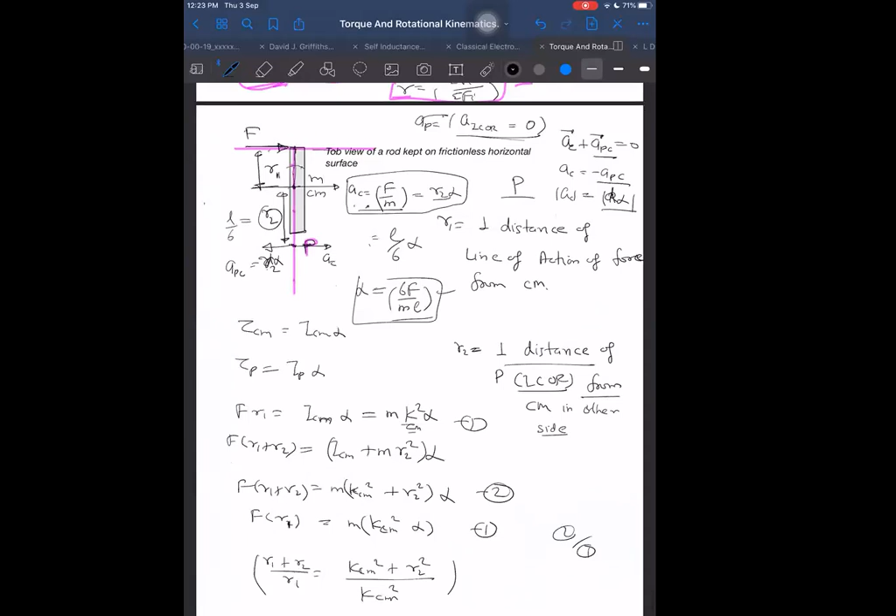Hafiz, I want to take a snapshot of this question. This disk question, where is the disk rotating? This is the disk rotating.

Sometimes snapshots will not be helpful that much, because I will explain many things here. So if you just take this snapshot only, then you will not get everything. But okay, you always have that choice to refer to the video also. Yes, it is good only, no problem.

Sir, I did not take it, sir. Why did you not take it? What were you doing? How much time does it take for a snapshot? In that much time, some students will write down. Sir, took, sir. Okay, fine. Took, sir. Right. And I am noticing, see, for example, what is the use of taking snapshot? Here time I did not see. That's why I'm saying snapshot will not be that convenient. I wrote this time before, but now it went missing suddenly.

Omega naught by alpha it is. Sorry, what am I doing again? Omega is 0, final omega is 0. Then this is equal to omega naught by alpha. That was also there, okay.

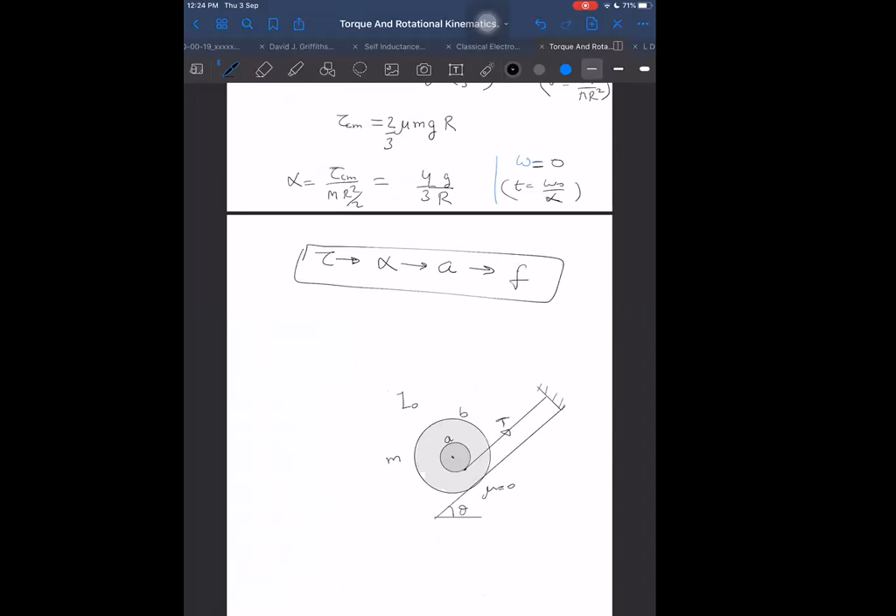Next, find it out now. Do it yourself, and then let me take some other questions by that time.

All the surfaces are frictionless, so there is no energy lost. Also find omega, angular velocity omega, and also find tension T. These two things you have to find out. So you have to go by that method to find forces, by this method I recommend. And to find omega, you have to go by another method. If there are no losses anywhere, then you have to find out by conservation of mechanical energy. So omega I have to find out, or here I can find by alpha also. Alpha into T will be omega. Depends now, if they are asking to find omega.

When the spool falls to a height, let me ask in this way. Find T first of all. Next is find omega as the spool falls. Its center of mass is, by the way, at the geometric center. When the spool falls through height h. That is the second question. Number one, number two.

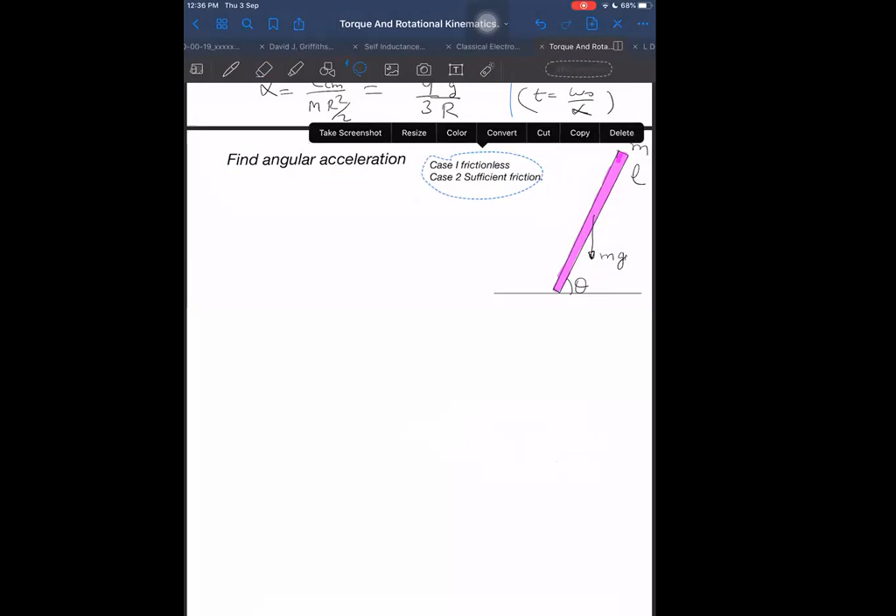Did you get something? Hello? You have to tell me if you already obtained the answer. Which one have you got? This one you got, spool? Full tension we got. Class will end, I don't know.

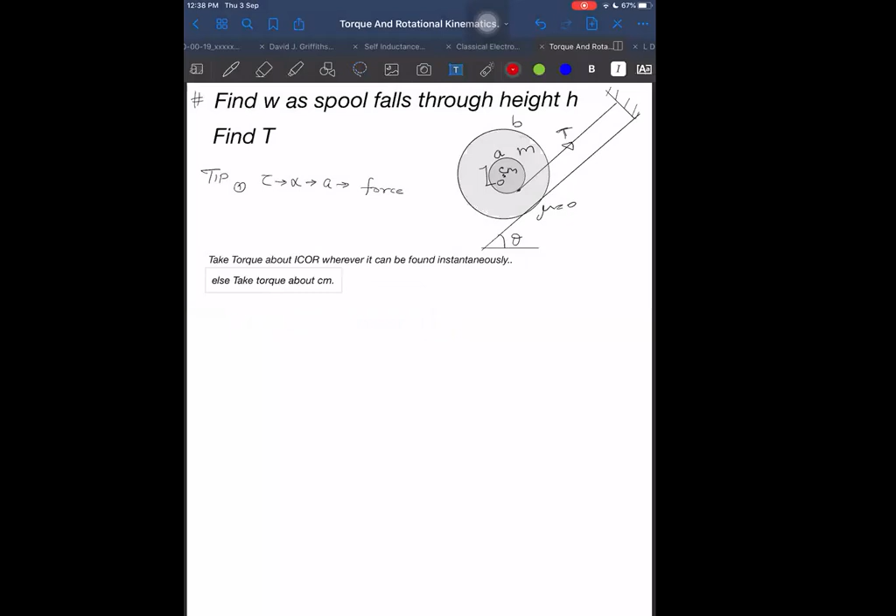Getting answer? That much time is not required, and moreover, I'm giving you hints and all the things. This is a very important tip which I have written here for you.

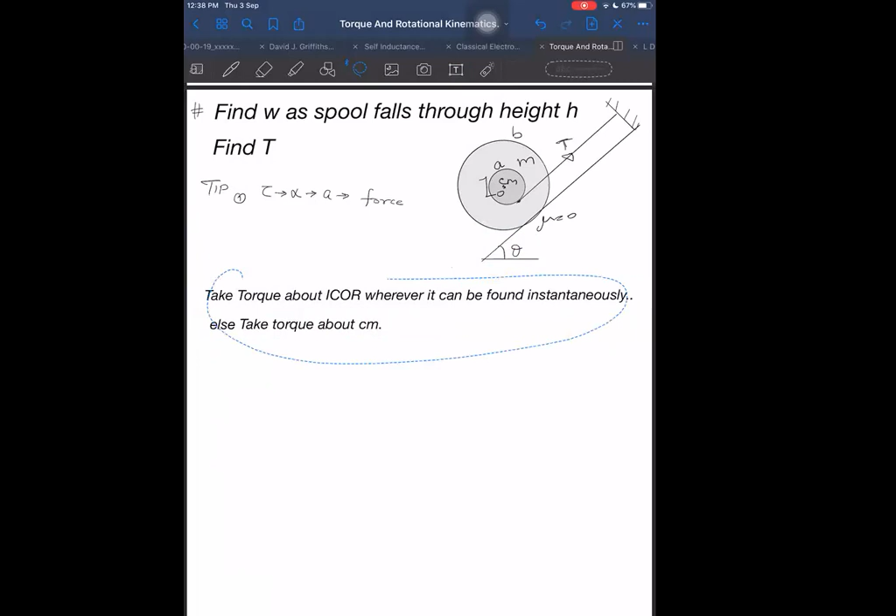Sir, I got this upper location one also. What? I got, sir, but right or wrong, I don't know. Okay, no. When you get it, then you tell me. Then after that, I will explain. No, right or wrong, obviously you cannot tell quickly. You may be committing some mistakes. Sometimes it is possible, or otherwise also maybe some conceptual difficulties. Maybe they may not be understanding the things.

This is the instantaneous center of rotation. Did you find it or not? Yes, sir, because this point is attached to this and it is at rest. In this whole body, this point is at rest at this moment. Once we are able to look at the point at rest, then we are able to find out the instantaneous center of rotation. So there are, see how many ways I have told you to find ICR. One way by locating the point where velocity is 0. One way by locating the point where radial lines are meeting. And another simple way where neither radial lines nor this, but simply it is a point which is along some point which is at rest already. If this point is at rest, then it is obviously ICR only. Once we have obtained that ICR, then we can now start writing equation about this point for the torque.

Or about which torque due to normal. Torque due to normal will be 0. Normal passing through this will be 0 torque, right? Torque due to mg cos theta will be 0. Only torque will be existing due to mg sin theta. Torque is only due to mg sin theta. Correct or not? Yes, sir. Say. Yes, sir, torque is only due. Yes, sir. Torque is. Then what is the torque formula for this case? What is sin theta into... A. Mg sin theta into A.

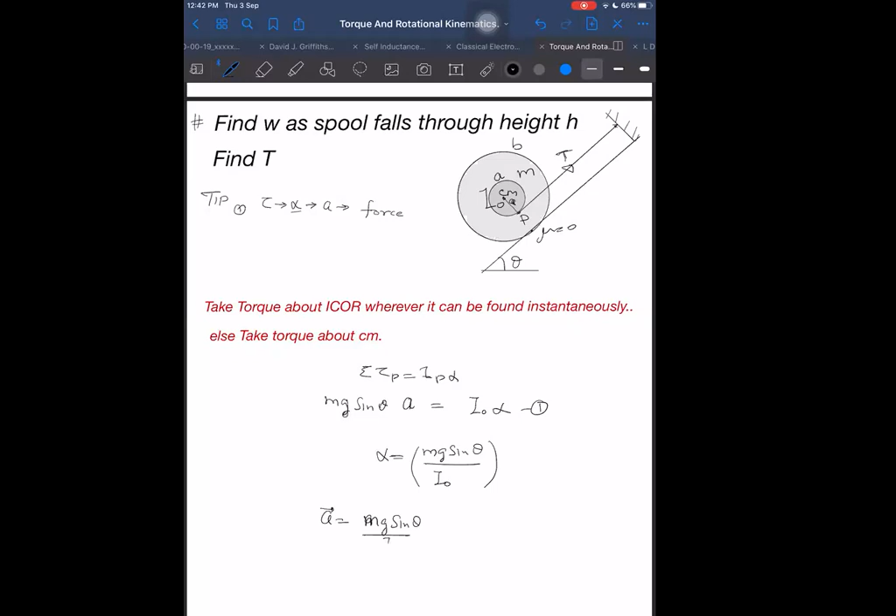Okay. Or I'm just writing it as acceleration A. Already one A was there. Yes, A square.

A square, then next we are getting the force equation now. Force equation: sigma F is equal to mass into acceleration along the incline. That will become mg sine theta downwards minus T upwards is equal to mass into acceleration downwards. I did a mistake by giving A as the inside radius, that is confusing with acceleration. A is not acceleration here, so I have not used any symbol for acceleration, I'm just writing A only.

We can take small c for radius instead, but I have to make changes in many places, so I'm not doing that now. Rather than that, I will prefer to take acceleration as something else. We can choose acceleration, not necessarily capital A. Maybe acceleration is capital A, so mass into capital A we can take. So then it is okay, no problem now, just this I have to change.

Sir, I naught is equal to moment of inertia at center of mass, method. Yes, obviously there we need to add moment of inertia. Sorry, I have to take IP then. I wrote IP, but after that I converted it into I naught, I don't know why. IP it is, and IP will be equal to I naught plus M into A square.

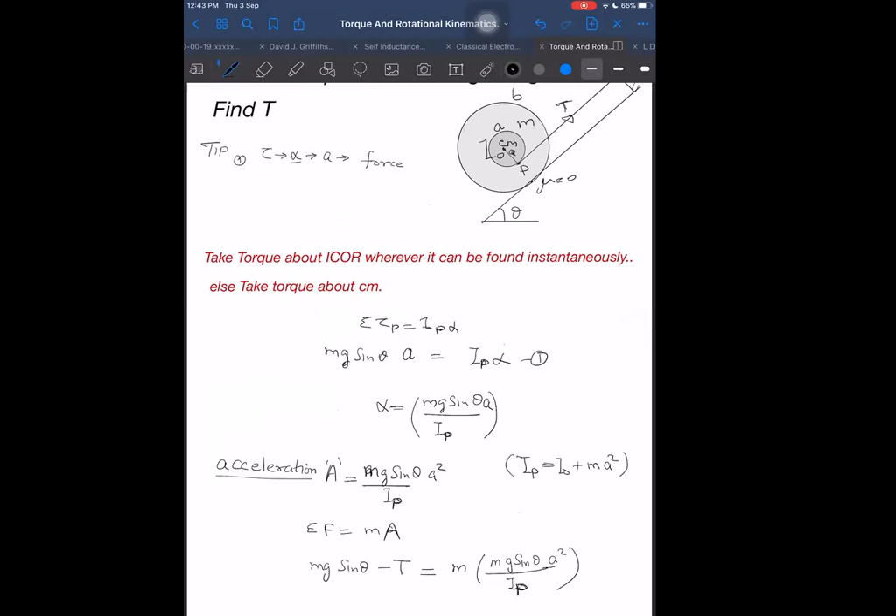So we are getting T now. T is equal to... those who got this already got it right, and it means they are understanding things well. Mg sin theta minus, G sin theta A square by, G sin theta into A square divided by IP. Those who got this already got the same right answer. Did you get the right answer now? Tell me. Same, sir. Very good.

What about for this question? Did you get it right or not? About which point would you prefer to take the torque equation first of all? Normal is passing through this point here.

Normal is passing through this point. Take center of mass, sir. We can take center of mass, but then N will be unknown. There will be two unknowns. How many unknowns will come?

At edge, two unknowns. I have a way to avoid those. Again I will take the same way, I will find out ICR. Sir, at edge, how will I find out ICR? I have joining the line.

This line of force, yes. From line of force, take a perpendicular to the center of mass and then produce on the other side. R1, R2 other side. R1 into R2 is equal to L square by 12, KCM square, right? From that side, somewhere it will be. And once I know that, the things become so easy that you can imagine we can find very easily after that.

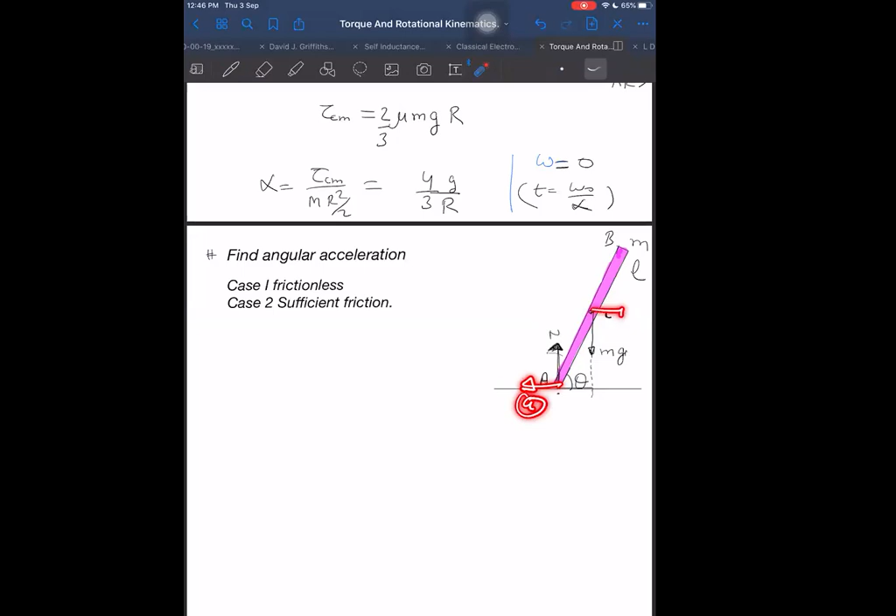If it has acceleration, then I will have to apply pseudo force. So if this point has acceleration, some acceleration A this side, then I have to take pseudo torque also, M into A. So that pseudo torque we have to take in this case.

But sir, if all these say methods... Sufficient friction, then no need to apply pseudo force. If there's sufficient friction, then it will not slip. Then obviously no need to apply pseudo force. Then it will be very easy to take about A.

Then I will not even... Then that is the instantaneous center of rotation. Yes sir, then that itself is the instantaneous center of rotation. Yes sir, zero acceleration, then itself is the fixed axis of rotation. Once we already know what is the fixed axis of rotation, then that is convenient only, obviously. Okay, then that is enough for us. That is itself acting as the instantaneous center of rotation.

So now try to do by these 3 ways, and tomorrow I will discuss all these 3 methods, right? Okay, one sir, sufficient friction case is easier, first. So you do first for the sufficient friction case. For sufficient friction case, I recommend you to do by 2 ways only.

About point A we can take, and we can take about C. And we cannot take about any other point. Other points will not be acting as instantaneous center of rotation when the friction is sufficient. And this point A itself is the ICR as well as the fixed axis of rotation also. A is the point. About the frictionless case, if I want to take, then I will take about center of mass once.

And I will take about A point also. And I can take about some other point, which is somewhere else, which is here somewhere, this P point. And I can take about P point. I will try to do by these 3 methods.

So how many questions are there now for you? C, A, P and A, C - 5 questions. These are 5 questions you have to do. And the answer every time for angular acceleration must be the same.

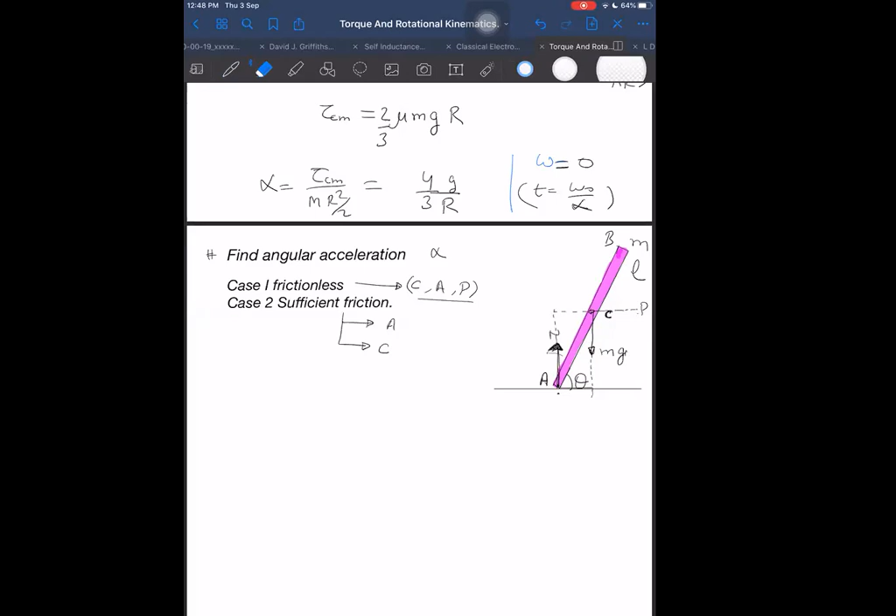Sir, if we take instantaneous axis of rotation as the center, what do we mean by that? What is the definition of center of rotation? If we take torque about center of mass, taking acceleration as torque zero about center of mass - okay, if we take torque about center of mass, right?

Then directly only tension will act, no sir? Only the tension will be the torque, no sir? Yes, right, then directly we're getting torque from tension. Yes, we are getting torque. How are you getting it? I am getting alpha. You are getting torque: T into A. T into A is equal to I naught into alpha.

But again, T is unknown, alpha is unknown - 2 unknowns in the same equation. Yes sir, 2 unknowns in the same equation. How are you getting the answer from that? Sir, after that - I'm not saying that is wrong. After that, yes, so 2 equations. Equals to MA. See, the point is not that you are doing something wrong.

That's why I said we can take torque about point A, we can take about point B, and we can still get the answers. But there are certain methods which are convenient, and which are the best ones. So the best ones are the ones for which we have to use the least possible effort. So among 2 equations, if I have to choose 1 equation, then I will prefer the method of 1 equation - that is my strategy. I will do it that way only. I will not go for... although if you think that way, it is also telling me one more thing.

Somehow you are finding it difficult to digest something called ICR, so you are trying to bypass it - that by center of mass also I will do it. Yes, if you want to bypass, it is okay, but then you will never be learning that method also. So don't try to bypass it. Try to go through it, try to understand it properly, and try to use it. Then only will you be able to use it in the examination. Otherwise, if you keep bypassing, you will always just be having one method only.